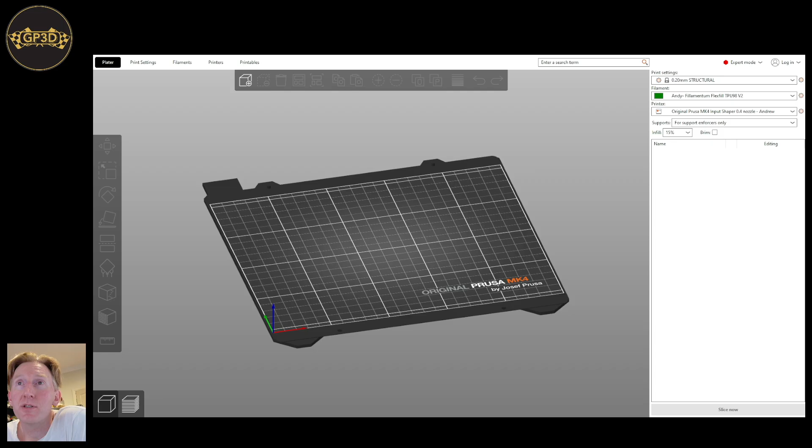Yeah, so this is the Prusa Slicer, and in the default view you get the 3D viewport, very similar to Blender in that way, that you can move around. And then you've got a whole bunch of settings. So you've got your plater here with all of its settings, print settings, filaments, printers as well. So the first step we want to do is add an object. So we click on the add here, and we go to,

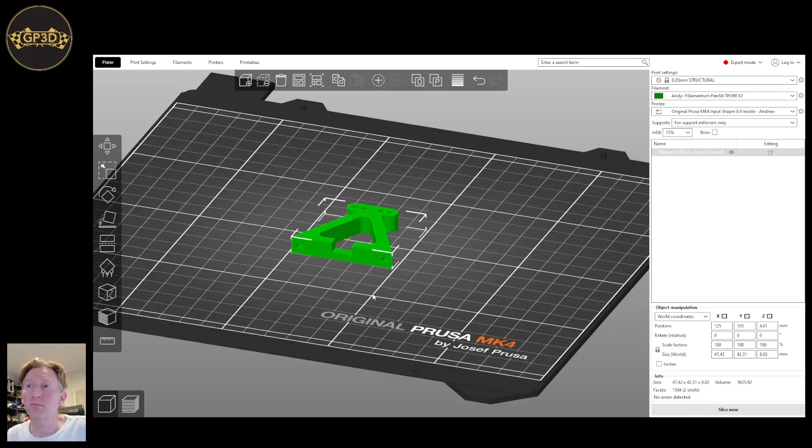just in the background, I will go and open the STL file that we just exported from CAD. There we go. So there it is. Magic. It'll come in here orientated the same as the way I designed it, which doesn't mean it's the way it should be printed or the way I want to print it, but it'll literally import in the same orientation as the way that it was exported from the CAD model.

So we can see here, it looks pretty good. If it was a bit of a broken mesh, like non-manifold, there's a really cool feature which fixes 99% of the cases. Well, let's go 95% of the cases. Fixes the vast majority of cases automatically. So you can right-click on the object and go fix by Windows repair algorithm. I think pretty much all slicers would have the equivalent of this. And it goes through a repair.

So when you bring it in, if you've got a little icon next to the name here, I can't remember the icon, I think it's like a warning triangle exclamation, something like that. If you just click on it or right-click fix, it'll do this little fixing process and fix up your mesh, which is really cool. If that doesn't fix it, then you've got to go back to CAD and work out the problem, like what we saw with the cylinders before. If it's too far broken, it might not be able to fix it properly. Or it might fix it, but not actually structurally correct for what you're trying to design. So keep that in mind.

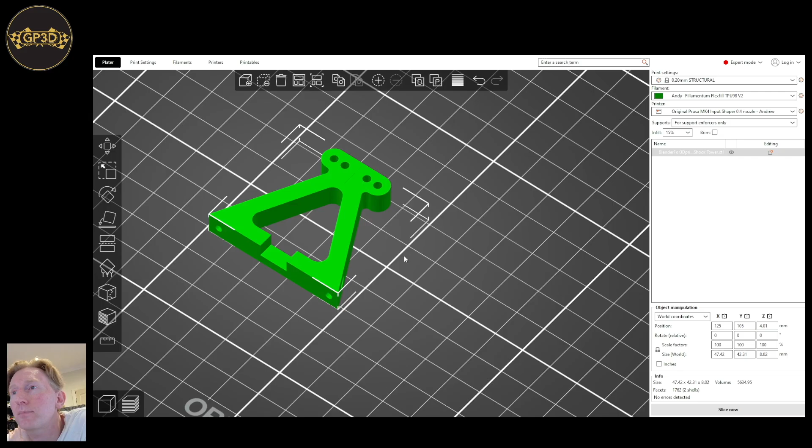With PrusaSlicer, like most slicers, but with this one, there's all of the pre-loaded configuration profiles. So depending on what layer height you want to print at, like 0.1, 0.15, 0.2, there's a whole bunch of preset profiles.

Filaments: you can install or activate any number of different presets for all of the different companies' filaments. So Prusa has all of their own products, of course, plus it has a whole bunch of other brands. Not everything in existence, but a lot. A lot of what I print is Prusament PC Blend, so I would select that.

And then the printer is whatever your actual printer is. So when you install the slicer, you would activate the printers that you have as printer profiles that you want to have available. So you can see here I've got the older ones: when I first started I had the Mark III and then the Mark III S upgrade, and since then the Mark IV came out and the Mark IV S. I've only got the Mark IV. I didn't do the S upgrade. It didn't really have a benefit for this type of purpose.

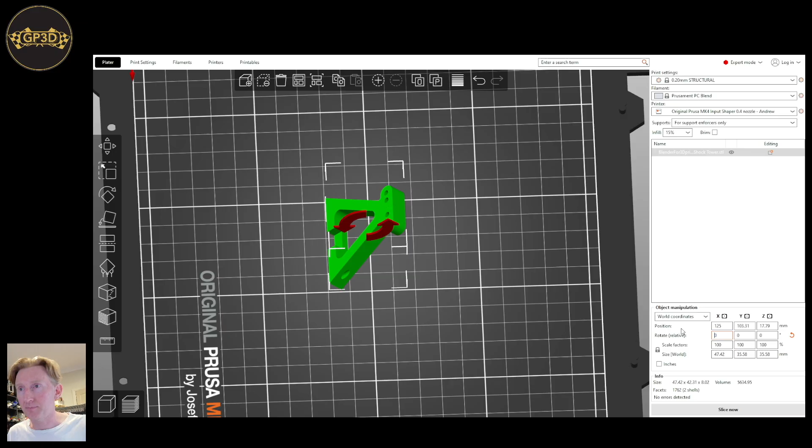So, for example, I might print it this way. So for this component, now we've got to decide how to print it. So it's a good segue. Every component would be kind of different in terms of how you decide to print it, like the angle you print it at and the settings that you need to print it with. So you've got stuff like this orientation. You can see there I've just tilted it up at 45 degrees. So I'll undo that. You could print it like this, and I'll click on slice.

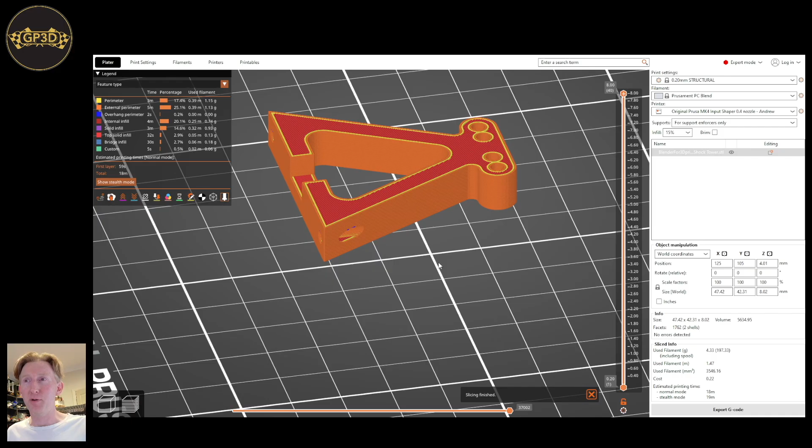Slicing is pretty much the whole purpose of this software, the slicer. What this does is it slices it horizontally into many layers. So we've set our 0.2 millimeter layer height, which is a pretty standard default. A smaller resolution, like a 0.15 or a 0.1, usually gives a nicer finish. The layer lines are less conspicuous. It's probably debatable, but I've found that a 0.2 gives slightly better adhesion, so each layer adheres to the previous layer better, which results in a stronger component.

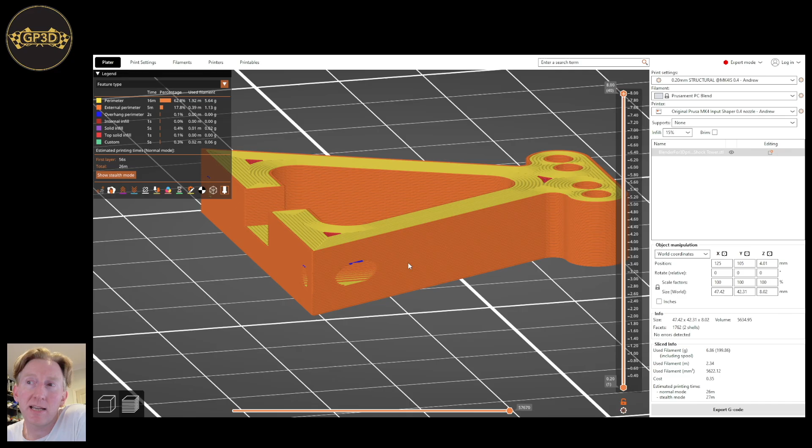So for most components, it's either 0.15 or 0.2 I print at. I think they're pretty similar. 0.2, I would say, is the ideal, as an arbitrary, non-scientific evaluation. The 0.15 gives you maybe a slightly nicer finish, where you don't see the layer lines as easily. And the 0.1 is the same thing again, maybe not quite as good adhesion, so it might compromise the strength of the component, but it'll look nicer on the surfaces.

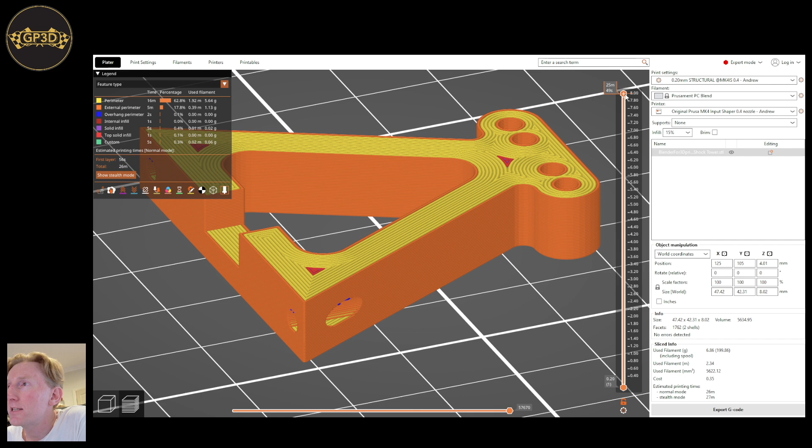So what you can see here is a few cool things. I've done the slicing, and we've got this slider here on the right. So if I slide this down, you'll actually see it at all these different layers of the object, which is pretty awesome. I'll change the number of perimeters here to 3.

And go back, because this will sort of demonstrate the layers a lot better. So right down the bottom, that's your first layer. And then this slider across the bottom here will actually show you the nozzle as it goes through that layer. So you can see the sequence that it's actually going to build the part, which is mega cool.

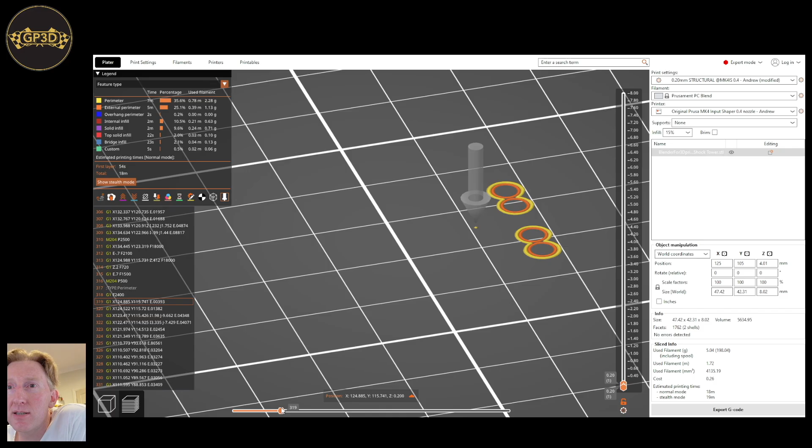How awesome is that? And then you can see here on the left, it's giving you like a preview of the G code. So the output of this slicer is going to be a file called .gcode, or in this case, it's binary G code, so BG code now. And that is the output that the printer understands.

So that sort of continues our process. The output of this slicing operation is BG code. I'll call it G code. And then that G code file is what gets transferred to the printer, and all these sequential instructions of coordinates and temperatures and movements is what the printer is going to execute for us, which is kind of very simple when you break it down into its granular pieces, but very complex at the same time, with all of these millions of little pieces working together.

So it's pretty incredible. Yeah, so this slicer is very cool software, and it shows you how everything's going to be printed effectively, step by step. So each one of these lines on the left here, like you can see they're numbered, is basically one step for the printer. So it'll be maybe one movement of the print nozzle, like an X coordinate, a Y coordinate. It'll be a temperature setting or some other retraction type setting, a whole bunch of different operations that the printer can do, and it's just telling it to do those things one set of operations at a time.

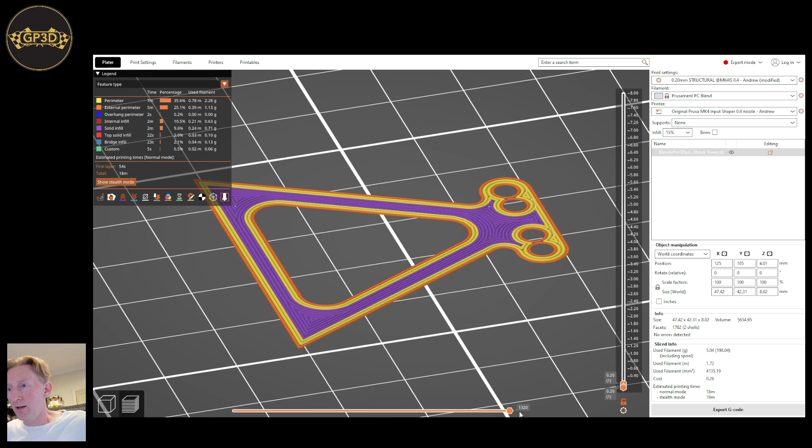You can see, even if you look at it, a code like G1, and then an X coordinate and a Y coordinate, and an E coordinate, which is the print head extruding, so E for extruding the filament down. So it's saying how much filament needs to be pushed out. So it's just a whole massive sequence of all these different instruction types. Cool. So we can see how this thing's going to be built.

And then we've got a whole bunch of settings. So print settings, layers and perimeters. So you've got your layer heights, number of perimeters, which is something I'll definitely like. If you're just printing a basic static model for the shelf, two perimeters is usually enough, and you'd probably be using a material that's not designed for high impacts. PLA, PETG is a nice material for static models.

Some of them, like the tough versions or some PETGs, could be used for RC racing cars or other similar models, but they definitely will break easier, and they tend to not hold threads very well. So if you're screwing a bolt into them, it'll cut the thread the first time and hold pretty well. But if you're taking it out, screwing it back in, it wears out the thread very quickly.

PETG and PLA are also quite stiff, so that makes them a bit brittle. PETG is a little bit better, has a little bit more give than PLA, for example, but is still not that flexible in terms of material properties compared to the PC blend. So that PC blend material has pretty much made everything I've done possible.

Like all of the suspension components, everything that's going to take force, take impacts, needs to be assembled and disassembled many times, like all the threads, to maintain their integrity. That material has just worked amazing for me. So pretty much all my kits, all my cars have been done with that, especially the off-road buggies, for example. So it's pretty awesome.

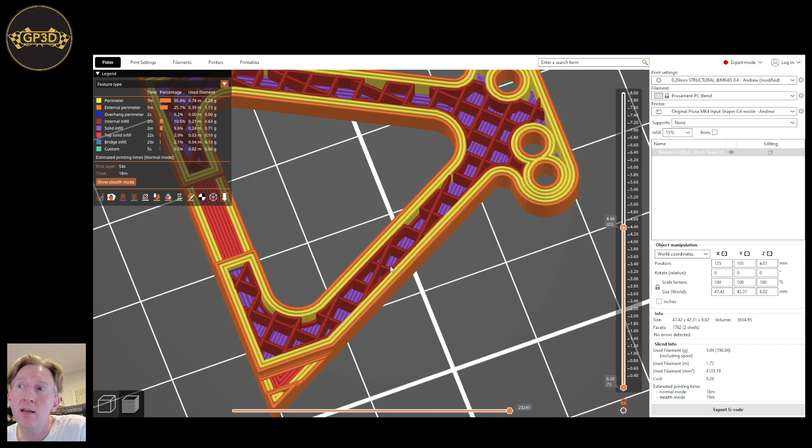And once you change all of these settings, you can instantly see the result. So you can see here we've got 3 perimeters, like 1, 2, 3. And if I slice it again and scroll down our layers a bit, you can see the infill now. Because I've only got three walls, you've got 3 walls there, 3 walls there, and then you've got the middle bit, which is the infill. And this is the rectilinear pattern, so basically a square rectangle type pattern in a sort of box structure, I guess, which I find adds good strength and minimizes the weight gain of the part.

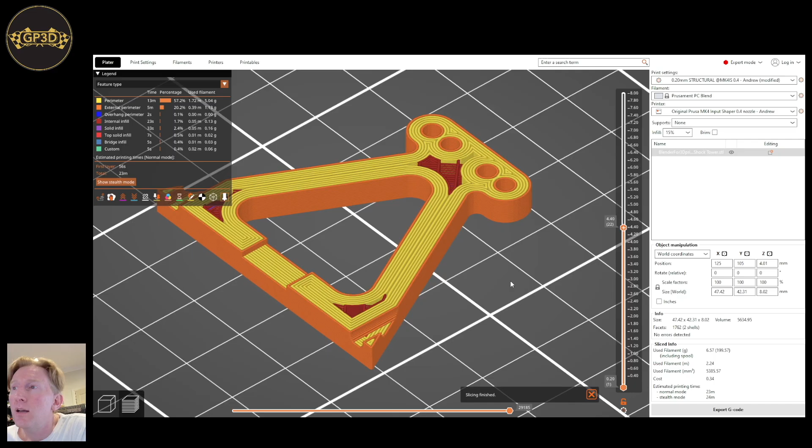So if I want to make this part stronger, I'd probably ignore the infill, and I would go and increase the perimeters. So let's see the effect of increasing it. So from 3, I'll bump it up to say 6. So if I go back to the plater, see it's gone away from the sliced view because I've changed the setting, so it has to reslice. So we just click the slice button again. Yeah, so now you can see we're halfway through the object here. Now you can see that we've got 6 perimeters.

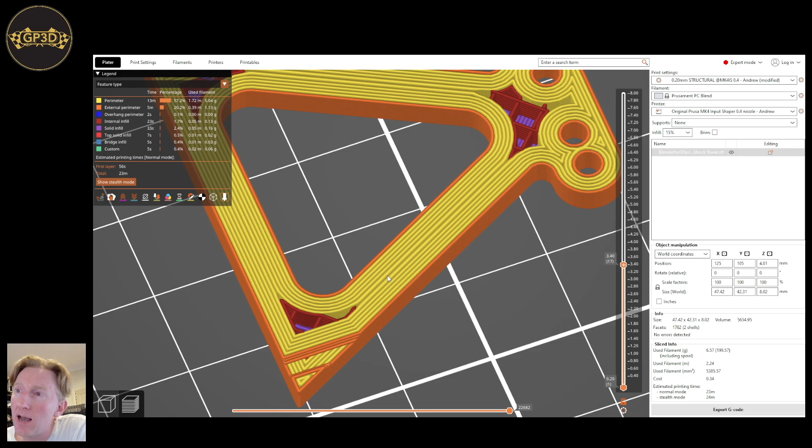So the orange is the outside perimeter, and then we've got 5 more inner perimeters, or inner walls, I guess. You've got 1 perimeter and then 5 internal walls. And in some areas of this part, that's enough walls to actually touch. It meets up with the other side, so you get effectively a solid component. But you can see in some areas where it's a bit thicker, the 6 perimeters don't fill the entire space, and then your infill takes effect. So you can see it up here a bit better.

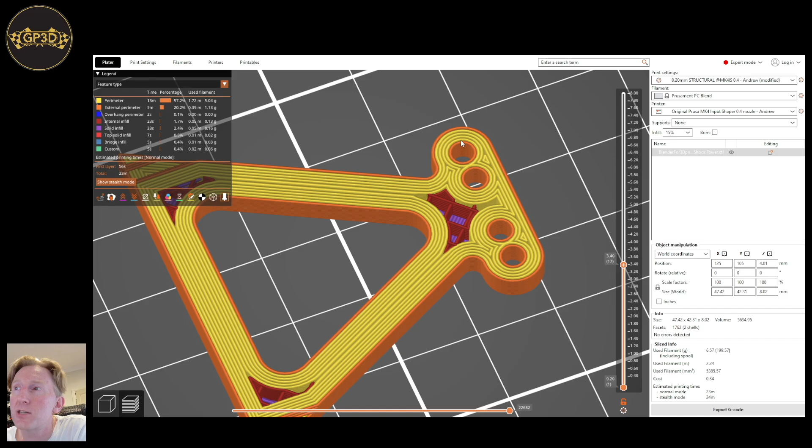So there's still a bit of infill here, but you might go, oh, that looks pretty nice. I'll leave it like that. It's got quite a lot of perimeters around the holes, so I'm going to get good support there, because that's where you need a bit of strength as well. So you could go, yeah, that looks nice. Or for such a small component and for such a minimal difference in weight, I might go, stuff it. I'll just increase the perimeters heaps so that effectively it just fills up the whole lot. So slice it again, and you can see here there's no infill now. It's just got perimeters all the way in until they meet in every part of the component.

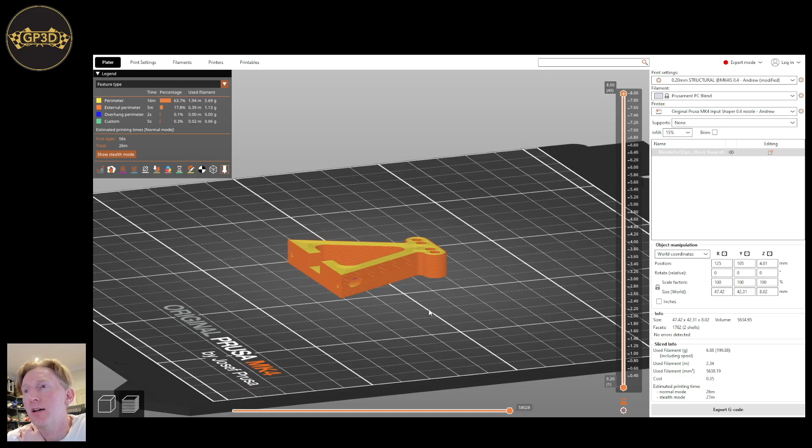And that gives you basically a solid plastic object. For this object, it probably needs it. With this PC blend material, the material shrinks slightly as it cools. So it prints super hot, like 275 degrees, and as it cools, it'll shrink a fraction.

And that shrinkage is an issue with 3D printing, because as each layer prints on top and starts shrinking, it's like 0.0 something of a millimeter, but you get that tiny amount of shrinking at each layer, and because the layers are stuck to each other, they can't pull inwards. The forces tend to pull upwards on the edges, so the edges of the component try to pull themselves off the print bed, which is the key issue printing materials that have that shrinking characteristic.

So what you can do, there's a whole bunch of things, but like a chamber, you print inside the chamber. So you can maybe see here behind me, in the other view. I've got, where is it? This one, little box. Yeah, so a chamber around the printer keeps the temperature higher and lets it shrink at a slower rate.

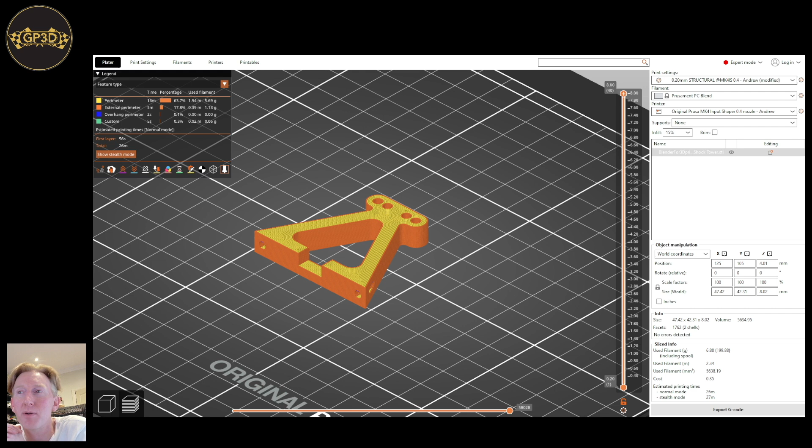So it helps reduce or minimize the tendency for it to lift off the print bed, because once the print detaches itself from the print bed, it's pretty much ruined. You might get away with it sometimes if it's only a tiny bit and it's later in the print, but you'll find the corner will lift up, and the printing above it will get a little bit squashed and messy, not the proper shape that you want the component to be. So if you're wanting accurate engineering components, it's critical to keep it down.

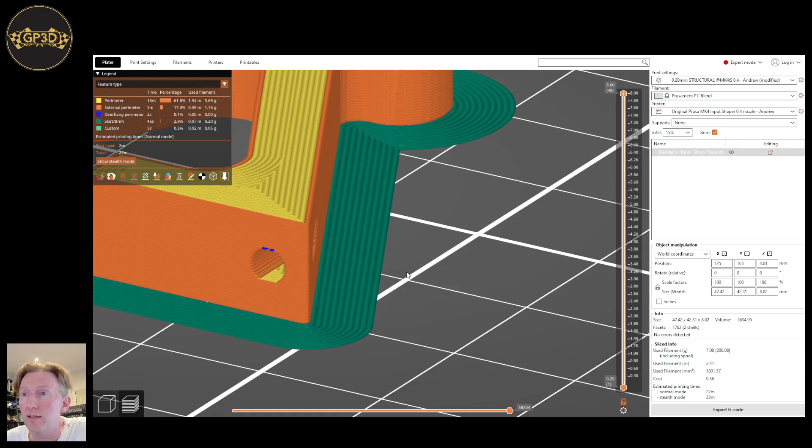So one of the methods of doing that is adding a brim. So you check the brim box and reslice, and now you can see the green is the brim. So it'll print this brim as extra material to give it adhesion. And because the brim is only one layer, you can see here, you just get one layer. There aren't layers on top of it to then try and pull it up or lift it up as it shrinks. So that stays nicely stuck to the bed.

And you get the interface between that inner line of the brim and that edge of the component, so that sticks together. So then it's basically stuck to your component. It's part of it initially, and that helps keep the whole thing flat and structurally accurate as you desire it.

And then after it's printed and it cools down, you break it off the print bed, and this is very thin, it's only 0.2 millimeters because that's our first layer, or all of our layers in this case, but first layer is 0.2. It's a very thin bit of plastic, and you can rip it off or you can slice it off, and then you just clean up the edges with the scalpel and sandpaper.

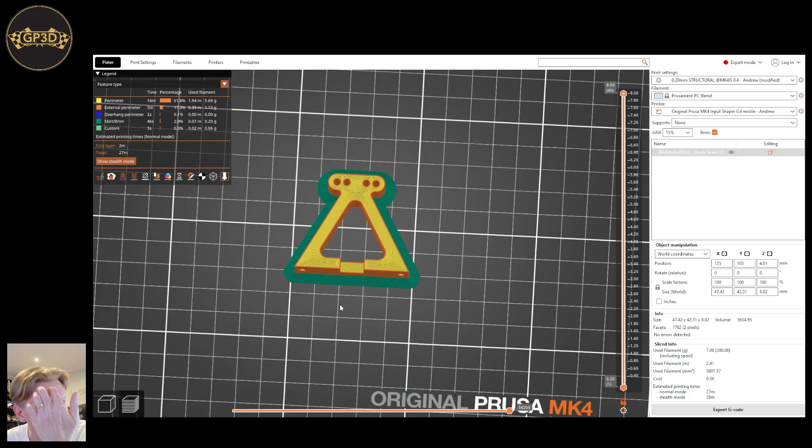So that's another good method that I often use, especially with a small component like this. You might get away with it or you might not. A smaller component you can get away with usually. It depends on your printer and your environment and the moisture and how clean your bed is, and what sort of preparation you do. So there's a myriad of items that I'm not going to go through in this video, for another day. And all those things affect whether it prints properly and stays stuck to the bed.

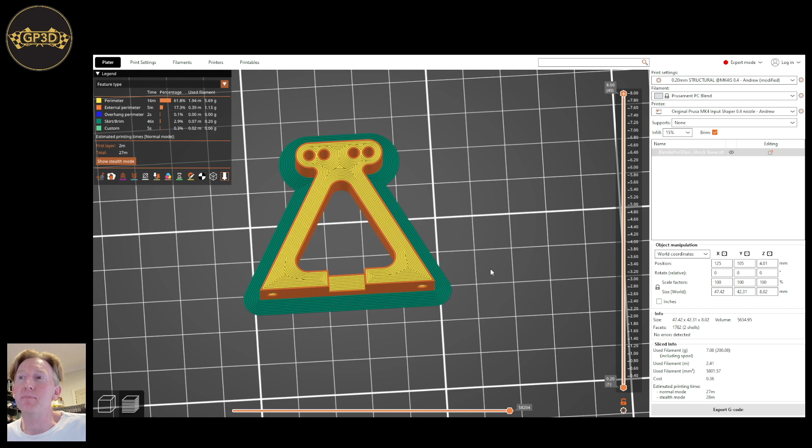Even the bed material, like the actual type of print plate that you use, steel and PEI and various other textured and non-textured materials. You can put glue on it, all sorts of stuff. But yeah, the idea is to keep it nicely stuck to the bed. So all of those aspects combine to keep it well stuck. Yeah, so I could print it like this.

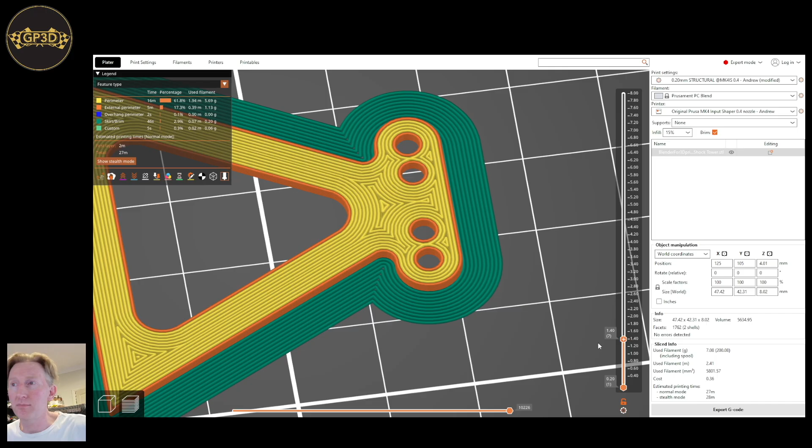It'll print nice and flat. You got a nice sort of shape of the thing. You get good flat surfaces. It'll be very strong around these holes because all the layers go up perfectly around the holes. It'll give you good strength for the threads to cut into and to support what it's supporting, the shocks in this case.

Oh, I noticed a hole missing. I'll get back to that. So those holes are good, but you come down here and you see this hole. So this one is actually a problem.

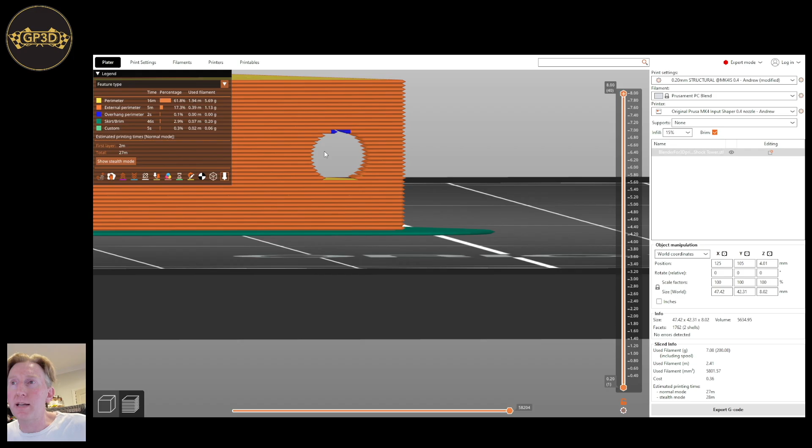So one aspect is, because you're not actually printing a sort of circle here, you're just printing flat layers, you tend to get an elongated hole. So this will end up a bit wider than it is tall, which usually isn't a major issue because you're just threading like a 4-40 or an M3 or whatever bolt into it, and it just cuts the thread and you're fine. So that's less of an issue.

But what you can see here is, I'll come down a bit more, we've got this very small layer area in all of these layers around the outside of the hole here. So this will basically be a weak point in the structure, and it's where it's going to break. So it doesn't matter how strong the rest of it is.

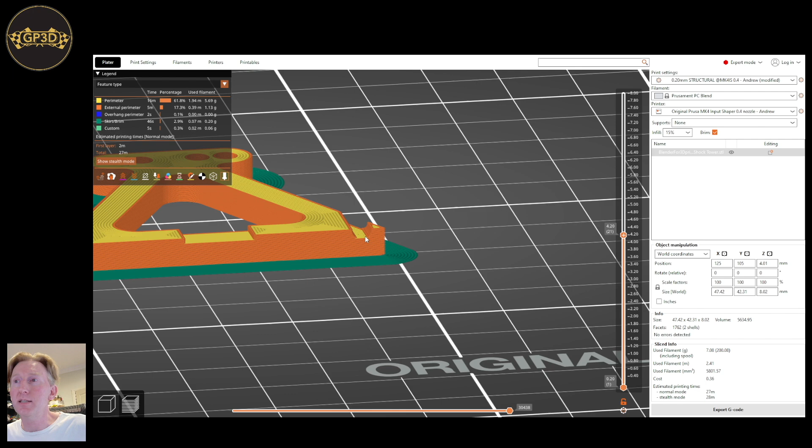Yeah, you've got really super strong points, but then you've got this super weak point, and nothing else is going to break, but this bit's going to break. So if you get an impact or a force, whatever, it's going to split here very easily on one of these points, and then you're stuffed.

So what we want to manufacture is to more evenly distribute the strength. So I might need to sacrifice some super strong parts or some cosmetically beautiful areas of the component, and I want to distribute the strength so it's more average, more even across the whole part. So we're basically lifting up the weak point.

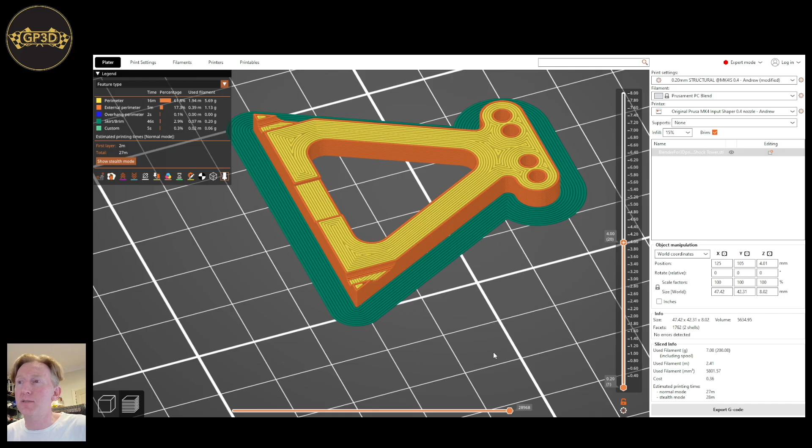We might need to lose a little bit of strength in the strongest point, but that's a balance that's going to be fine because if it breaks somewhere, it doesn't matter how strong the strong point is. And generally, if you can make your weakest point strong enough, anything stronger than that's going to be better again. So it doesn't matter that it's 90%, not 100% strong.

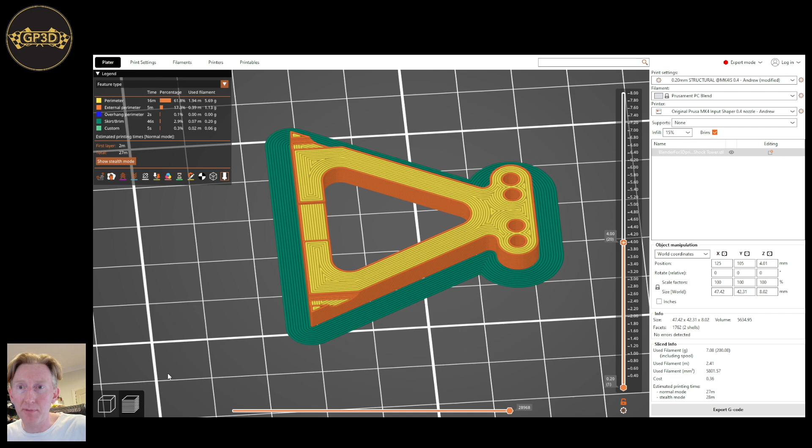Yeah, so for this component, what I will do is go back to, so this is the slicer view, which is this icon, and then the one to the left is the editor view. So I think tab will toggle between them, so pressing the tab key, or you can just click on these icons. So yeah, we'll go back to the editor view, and I'll do two things. First is, I noticed I've missed a hole.

So my component has a hole in the top, oh yeah, you can see, there you go. Little tiny hole in the top, which is actually, I think, where the top shock mounts for the pod. And I have probably forgotten it. So this is a good demonstration of the iterative process. I will toggle back to Blender and go, yep, I have missed it.

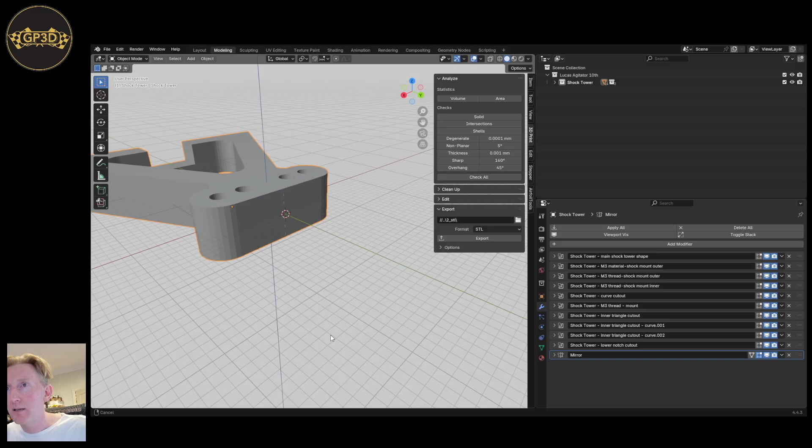So very easy. It was hiding around the side there. So I've got the cut out here and give the same treatment to it, change that to wire. And then, shock mount, yep, I've missed it here. So now I want to go Q and B. I'm going to add another boolean, and I'm going to make it that one, center top, fast, copy, very good.

And I'm going to demonstrate something here as well. So see how this is now sequentially after the mirror. And in this position, in this object, it would actually work either way. So I could drag this above the mirror, and you can see that it's pretty much doing the same job, making a hole.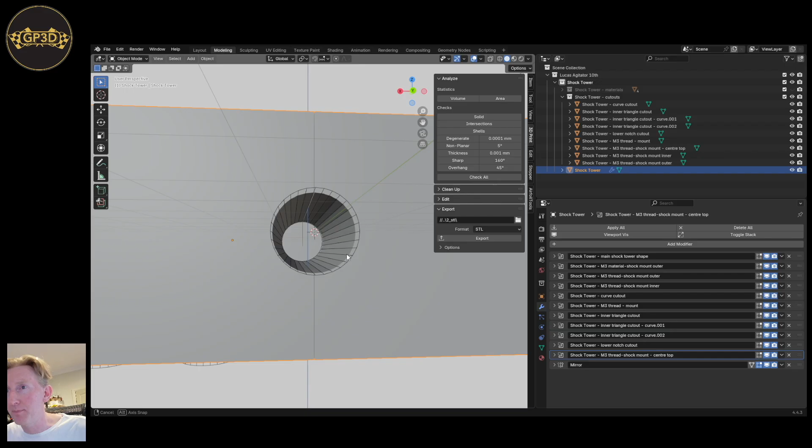But I'll grab this and move it 5 millimeters. So we'll put this back, but just say that was the design. And I go back to here and add my boolean below the mirror. See how, because effectively the mirror has happened first.

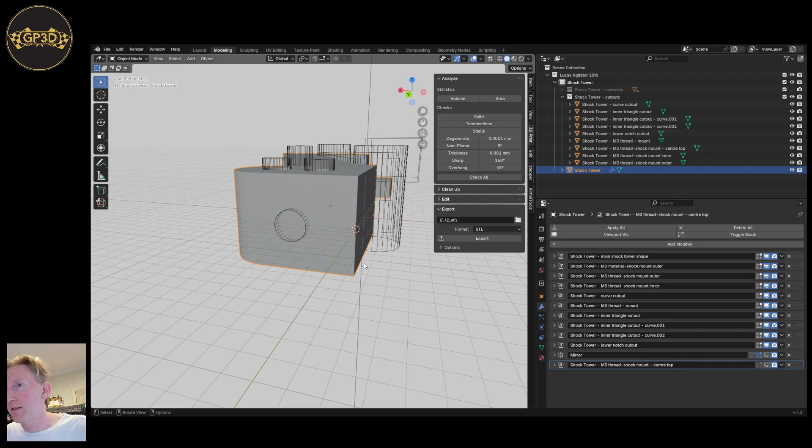So if my mirror is about to happen, yep, there we go. So if my mirror is about to happen, my object looks like this, my hole doesn't exist yet because I haven't executed it. So remember, this executes in sequence, top to bottom. So if I then execute the mirror, I get my object here, and then I execute my boolean, which happens afterwards.

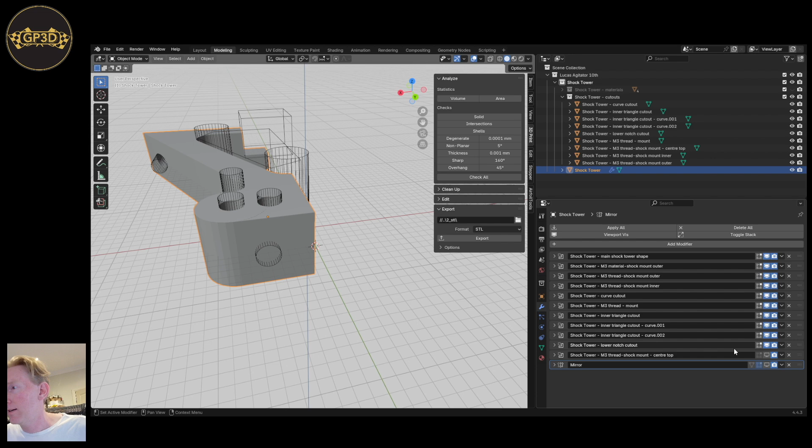This is my boolean operator object, and it chops out a hole here, and that's it. But just say I want there to be a hole in both sides, if that was the design. I want to move that to above the mirror. So basically I come down here, I execute that hole, and then I execute the mirror. So that's what Blender's doing in terms of processing sequence. So then I would have my hole on both sides.

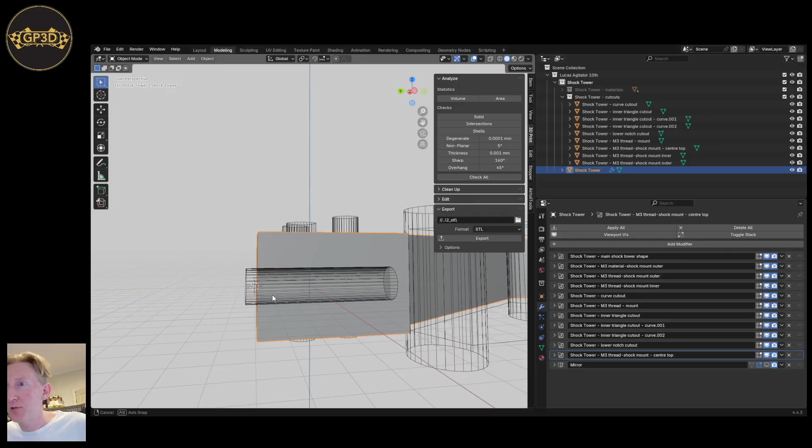Because this is in the middle, it kind of doesn't matter, but I found best practice is just to do it the same way. So you'd put this before the mirror. So effectively, it's just chopping out that hole there in our object as it currently stands, which is half the final result, which is what we want. And then we just mirror it. So execute the mirror, and our final result is a hole in the middle.

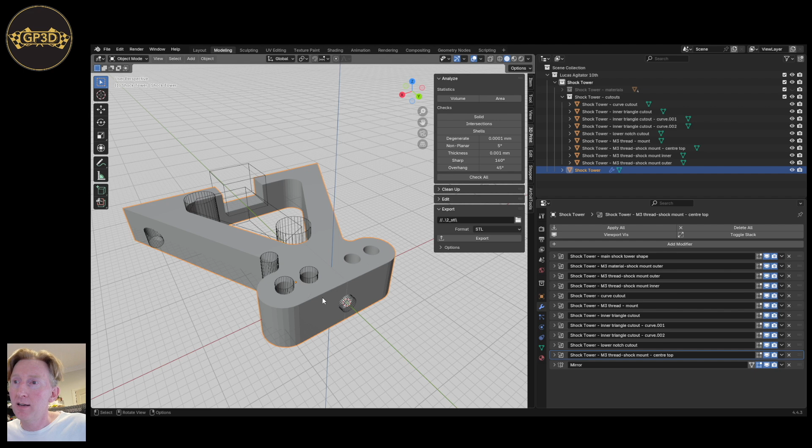So it's really super easy doing this non-destructive type Boolean modeling. Super easy to make those sort of changes, fixes, evolution of your component. So now I've done that, I just go and export it again. And if I flip over to the slicer view, because I've already imported this object, it's basically pointing to that same file. So all I need to do is refresh.

So I can hit F5. F5 will refresh all the objects in the slicer. I've only got one imported now, but F5 does that. I can also right click on a specific object and go reload from disk. And you'll see now I've reloaded my model and it reflects the fix I did, which was to add the hole in there. And that's that process. Awesome. Cool. So that was the first thing.

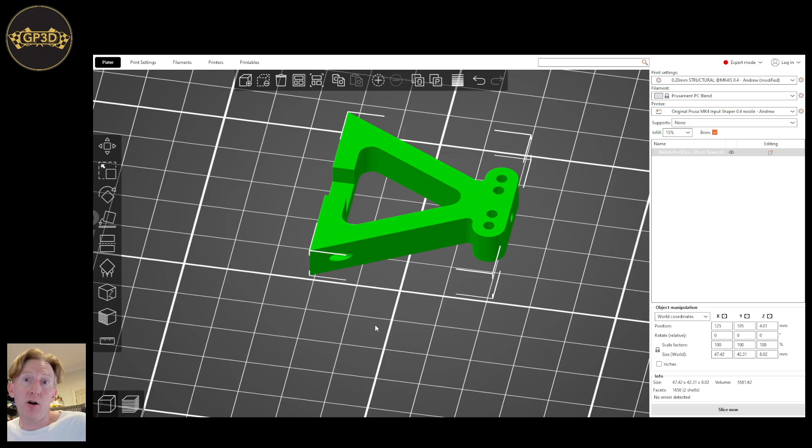So second thing now is I want to try and improve my strength here. As I mentioned way back at the start of the videos, I will probably change the design of this area a bit, like add a bit more material. I might put a step sticking out with a nut on top, so you could secure it with a nut as well, potentially. I'd look at the car, it might be able to extend out a bit further if it doesn't hit anything. Just increase the shape of the component to add more material, which will make it stronger. It might be strong enough as it is, might not be.

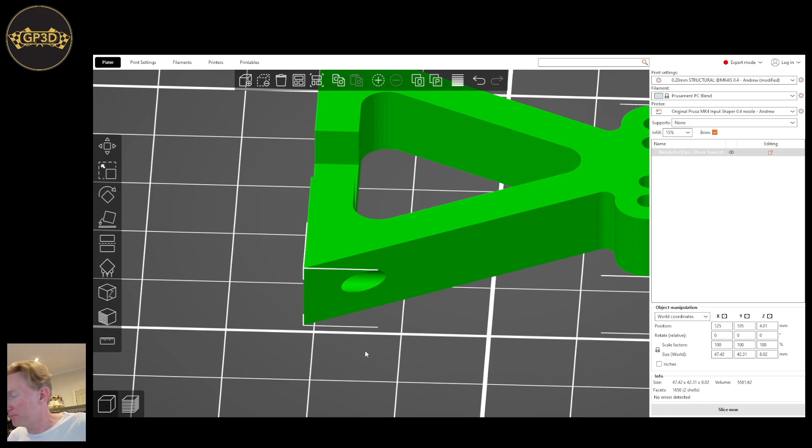That's the evolution process of designing, estimating how strong parts need to be, but then you ultimately have to go test them and see if they break or not. Not scientific, but that's the way I do it. And after a while, you obviously get a pretty good feel of what works, what doesn't, how much material you need in certain circumstances to make a component fit for purpose and strong enough. But initially, it's just gut feel and trial and error and physical testing.

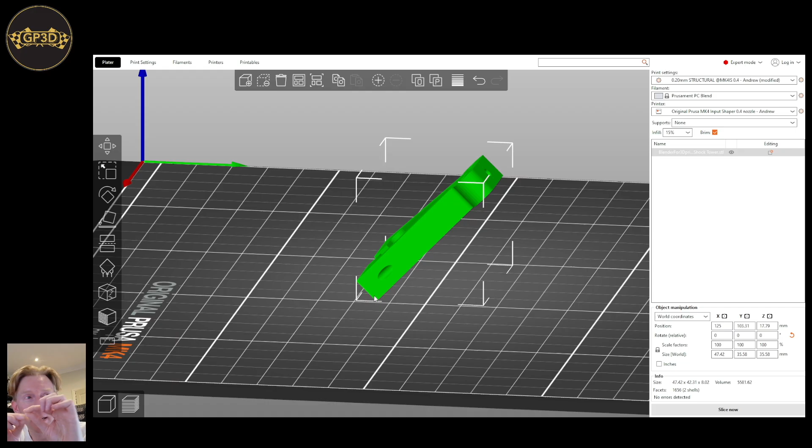So I'll just say this object as it is. What I would do is probably rotate it. So I'll tip it up at 45 degrees. 45 degrees is a super cool number in printing, because it means that you don't really need much support, or maybe no support in a lot of cases, because printing layers upon layers at a 45 degree overhang will effectively work. You can't print in midair because of gravity; the molten plastic will just fall, so you can't print onto nothing.

But what you're printing onto is the previous layer, and a 45 degree angle gives you enough non-overlap, I guess. Some of the next layer of print will be off the edge and some of it will be on the previous layer, so you've got enough on the previous layer that it sits properly, prints nicely, and you get the perfect result. So 45 degrees is a very important angle. Cool. So now this has done a number of things.

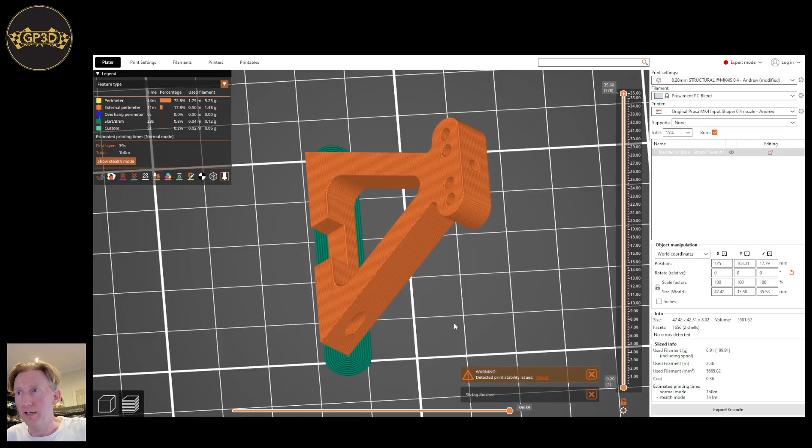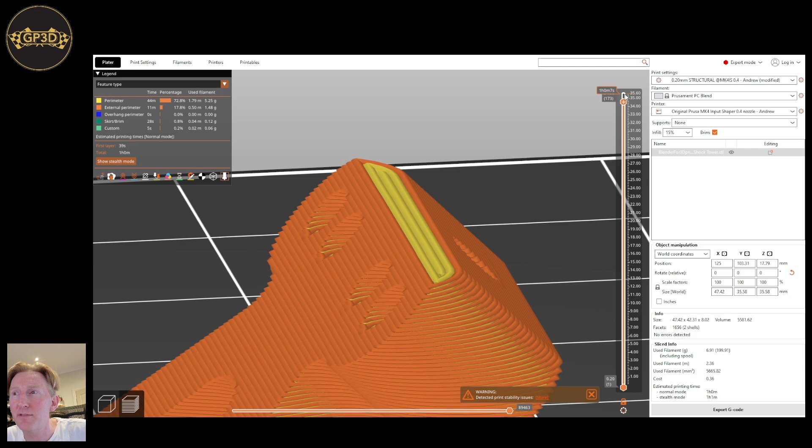One is I'll do a quick slice. So we can see there's actually no top and bottom surface now. This one line is our bottom surface effectively, which is negligible. And there is no top surface, but the very top of the print is this one line here. So the top layer, if we go down one layer, you can see that it's like one little layer. Go down a few more. So effectively we've removed the top and bottom layers. Everything is pretty much a sidewall, which also gives you a nice consistent texture.

So 3D printing, you obviously have all of the layer lines, but you get that evenly across the whole object rather than layers on the side. The print bed, the smooth print bed or the textured print bed surface at the bottom, and a top layer which looks, you can see all the lines where it fills in the top layer, and generally it's not consistent texture. It never looks fantastic. Looks is a secondary purpose here, but it is quite important. I like to try and make it look as nice as I can as well. So yes, that's one thing it's done.

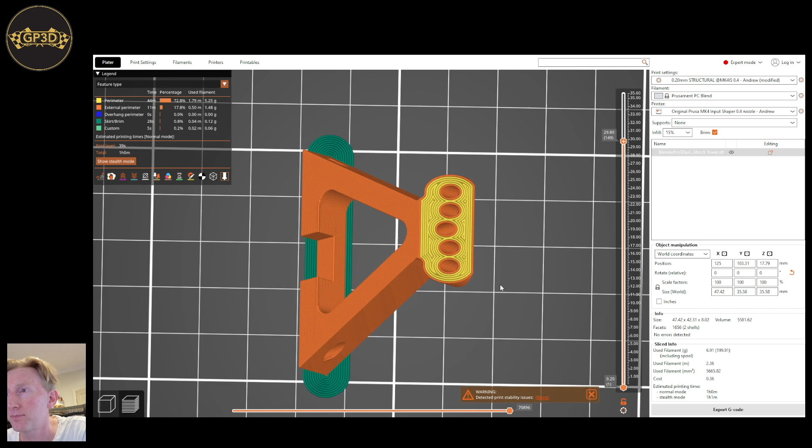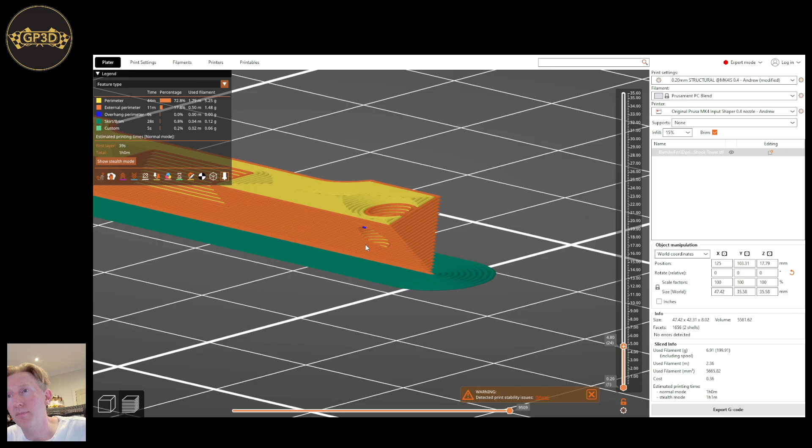The second thing it's done is the cross section around the holes will be bigger. So up here it's all good. It will be probably even better than it was before, because you've got a lot more surface area. But effectively, it'll be good both ways there. But if we go down to this problem area, so this is the sort of bottom of the actual component where it goes in the car, and the bolt will go up through the carbon plate and try and thread into here.

So what we've done here, it's the best way to show this. Yeah, so at any point around the hole, like sort of here, or even further down, we've got a lot of surface area, like big massive surface area. And then as it goes up and it encapsulates the full perimeter of the hole, we've still got a lot of surface area around. We've still got narrow edges, of course, because that's where the hole is, and that's where you'd redesign the actual shape of the component if that was not sufficient.

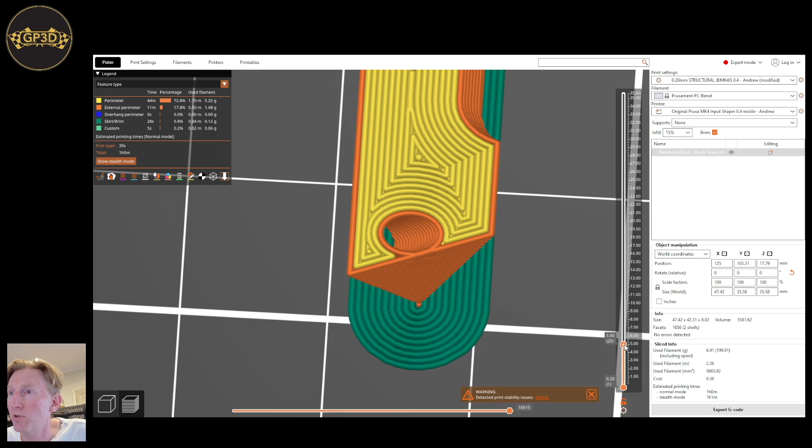But what we have done just by orientating it as it is, we've increased a lot of the surface area here. So it's not as small as the previous version would give us in terms of the weakest point. So we've basically bumped up the weakest point massively, and that could well be strong enough. Might not be, but that's the testing step after that, or decision to add a bit more material, because it slants in. I could easily make this more of a square shape, of course, and go up a certain amount and then come in. So that's the design revision process. Yeah, so as it is, that's pretty good. It might be sufficient.

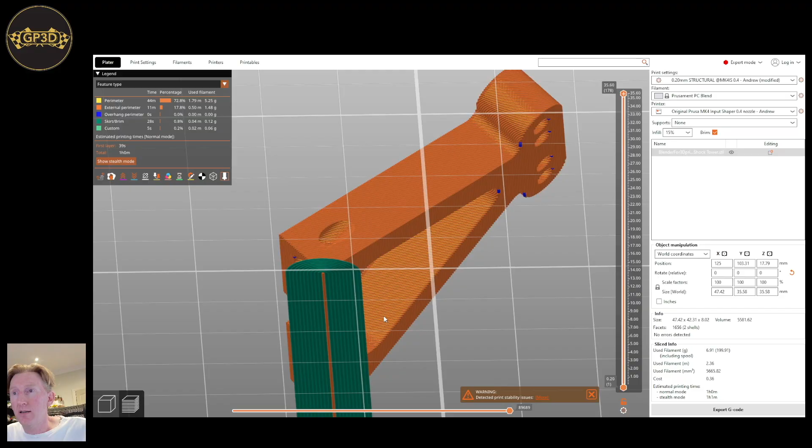And then the third thing it's done is made this print very unstable. So now we've only got this one skinny line, which is the first layer. So if I go right down to the first layer, we're anchoring this whole print on just this one thin line, which might come detached, like it might warp, it might not be strong enough, the whole part might wobble as it prints, a little bit of vibration, so you might get very bad print quality, and all the sides will be terrible if it vibrates too much.

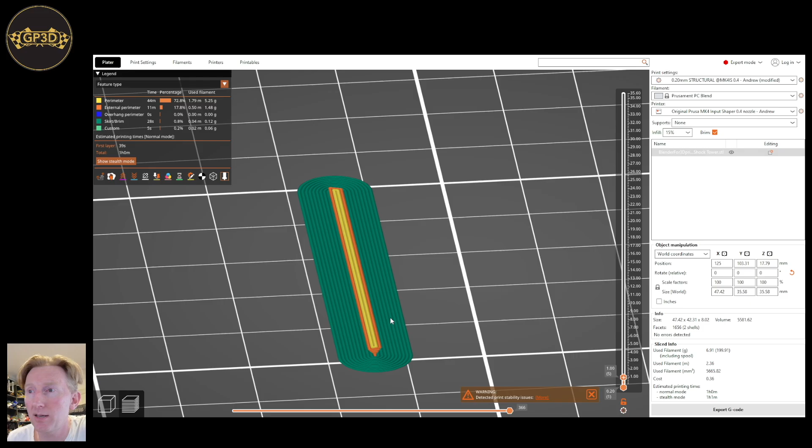It might simply just break off if it gets slightly knocked by a bit of extra material as it prints, if there's an over extrusion or a bit of debris. If the print head just puts a bit more force into the object as it prints, it can just literally break it off the bed and your print's dead. You have to start again. So there's a couple of ways we can address this.

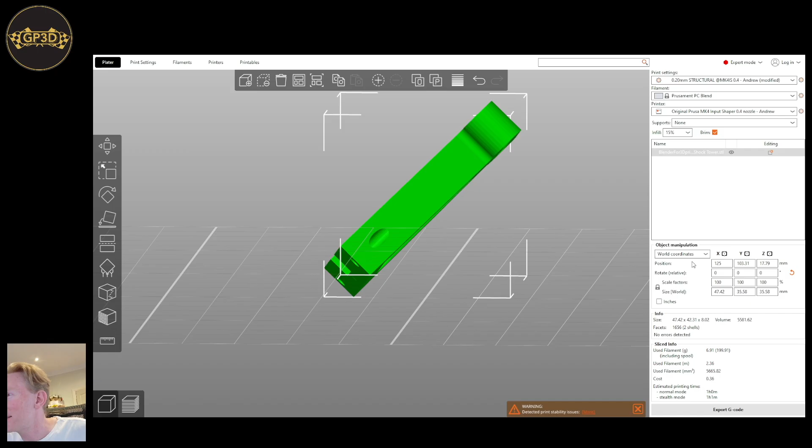For this one, the main and maybe the only thing we need to do is, I'll just toggle back to edit view, I can actually sink this component into the bed. And obviously it won't print anything below the bed because it's a physical thing, but we can see here the Z height of where this object's sitting, so its center is probably up here somewhere, wherever we designed it. But if I drop this down, I can drop it down numerically or using the interface, we go from 17.8 to about 17.

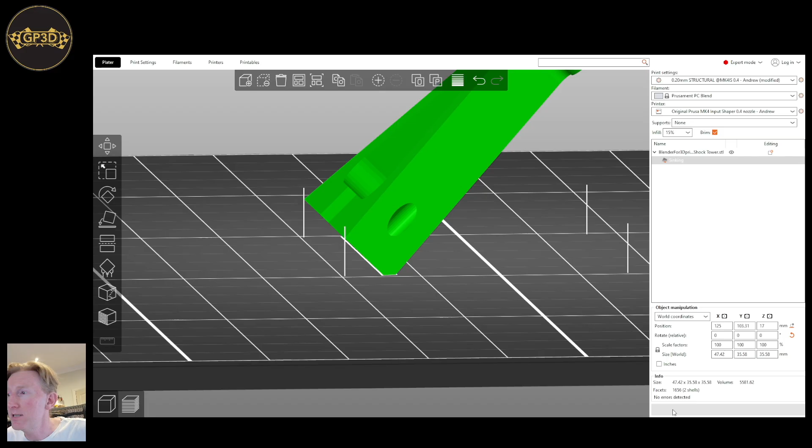So now you can see this has actually dropped, it's called sinking. So I've actually sunk the object into the bed, which effectively chops off that piece of the object, so it never gets printed. It will only get printed from the bed upwards. So now if we slice, you can see here, instead of just one line, we've got 3 lines. So I've got a bigger surface area for it to contact.

And that may or may not be enough without support, or we can add support as well. So we could keep going. Another way to do this is to select the object, click the move icon and grab its handle. So see here, I can move it up and down, sort of freeform.

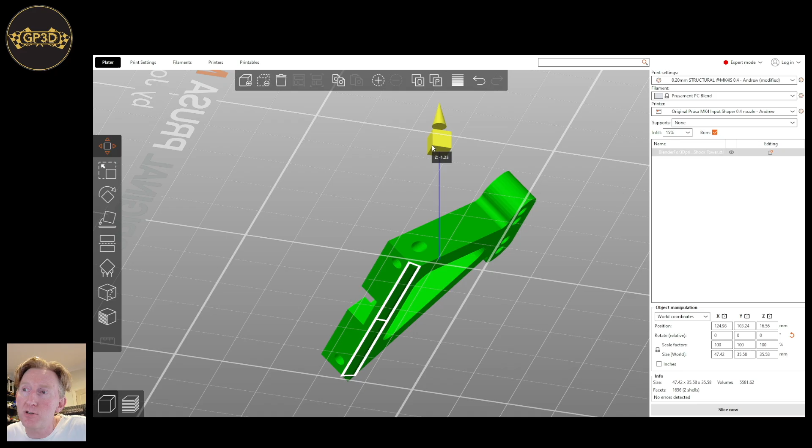I'm sacrificing a portion of the object, which may or may not matter. In this case, it probably won't matter too much because it mounts by these 2 bolts. I've still got quite a bit of surface area for it to sit flat onto the carbon plate it attaches to. So basically just trying to find a good compromise of increasing that surface area as much as possible without cutting off too much of the component.

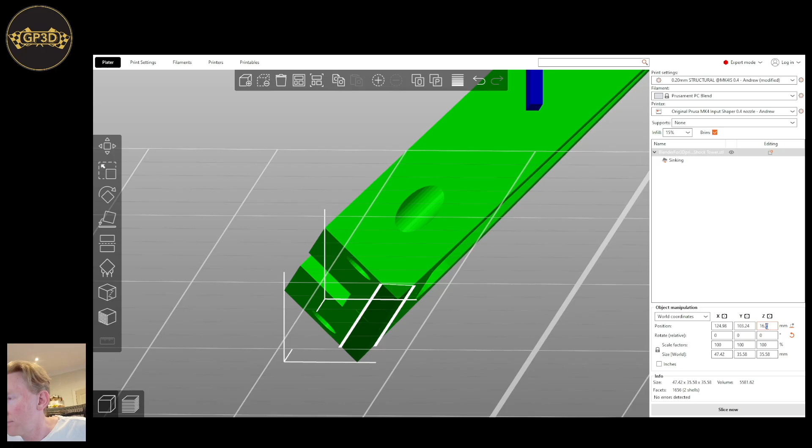So I could change that to say 17, 16, yeah. So that's probably pretty good. So it chops off the corner a bit. 16.8 still leaves enough surface, so when you bolt it down, it sits flat and it won't wobble or break because of that. So that gives us a better adhesion to the bed.

And then the next thing to look at is supports. So at the moment I've got supports set to none, which is set here. And I can also look up here, see these blue parts, that indicates an overhang. So that's where it's actually going to print, in this case, a very small amount of material over thin air. There's no plastic below that when it prints it, which means for that little bit, it's going to sag a bit away from where it ideally should be.

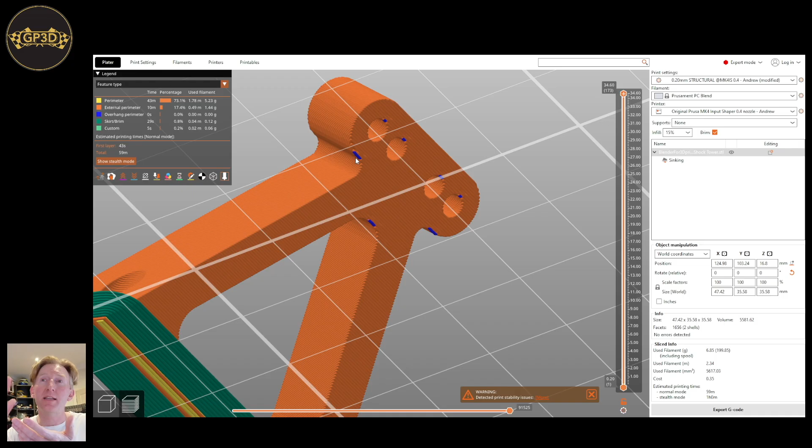And that'll give you just a rough spot on the print. You lose a bit of material. It's ugly. If it was really bad, you would compromise its shape and strength. Tiny bits like this probably won't matter too much. You'd just trim it, sand it with a bit of sandpaper. It's so minor it probably wouldn't matter. And these ones at the top of the holes definitely won't matter.

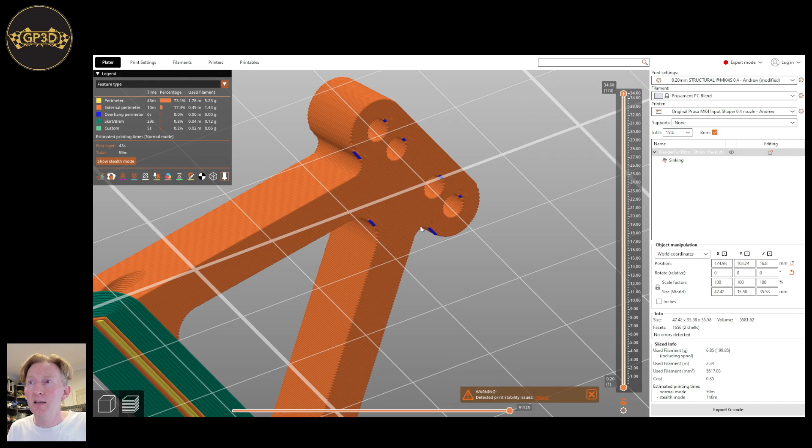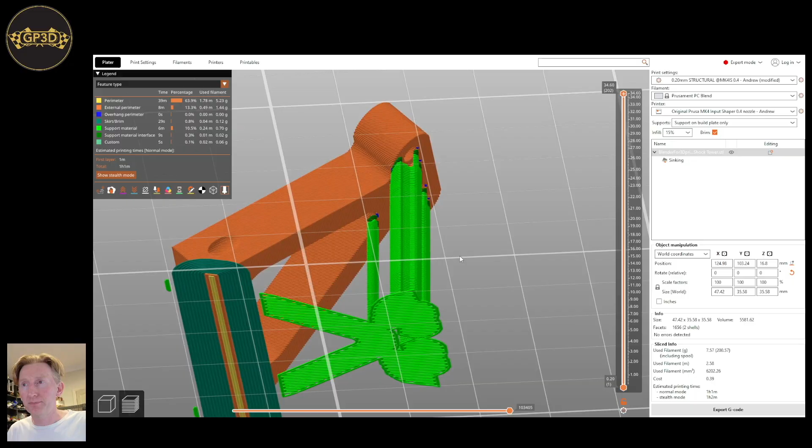But what you can do is enable supports. So firstly, I'll enable support on build plate only. So that's that setting there. And then reslice. So now you can see it's basically an automatic determination that's made based on all of its settings, which we can manipulate. And it's put up these bits of supports, which are probably not really going to help much, based on my experience and gut feel. So I would probably just print it like this.

The other option is paint on supports. So it's kind of like an override saying I want more supporting capability, or a more comprehensive support at certain areas. So I can go into this mode, which is the L key, and it gives me paint on supports. And I can say I want some more supports in these areas.

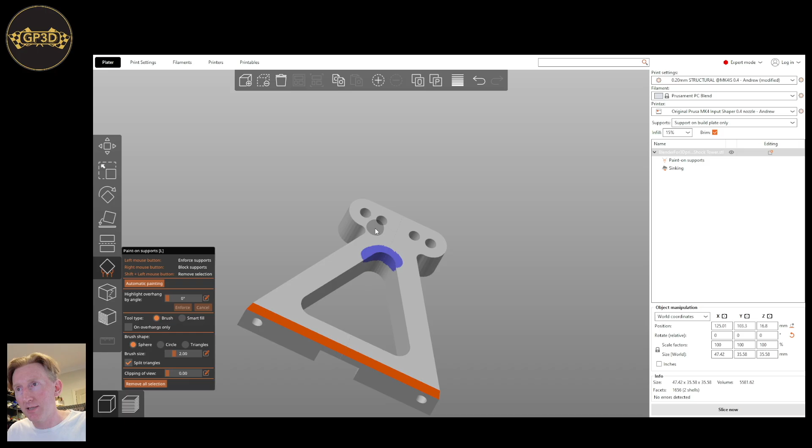And these holes, I probably would leave normally, but I can right click and actually put a red mark, which is a blocker. So that's going to block supports from the top of those little holes because it's so minor it's irrelevant. It just wastes a bit of time and material in the print. But the key area is there, which is an overhang.

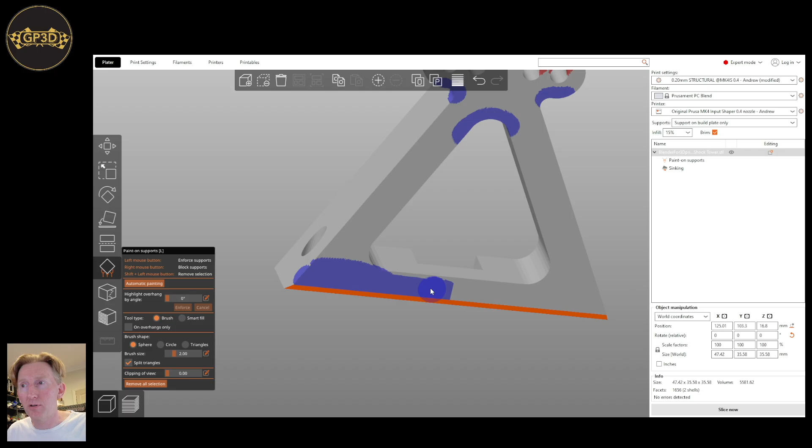I could add a bit more support down the bottom if I felt it was necessary, put it along all this area to just give it a bit of stability, but I don't think it really needs it. So yeah, let's see what that looks like though. So that's my paint on support. So I'll slice again. So now we should be able to see a few things. So see all this dark green interface.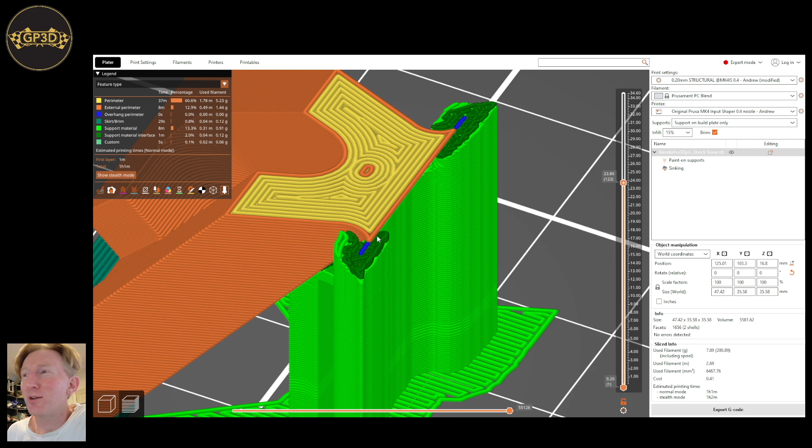So that has given me some extra interface material, in dark green, making sure it supports this bit of blue, which is the overhang, as best as possible. So it's only that tiny little bit. As I said, it probably would be sanded off, no problem, and it would save you all of the extra material and time for the print. But that's a decision of quality and necessity versus time and material.

It's probably only a few cents of material and 5 or 10 minutes of print time. On a small object like this, it's irrelevant. On a bigger object, it could make a big difference to your material usage, your cost, and your time cost. Yeah, you can see it also here along the bottom, because I painted that bit.

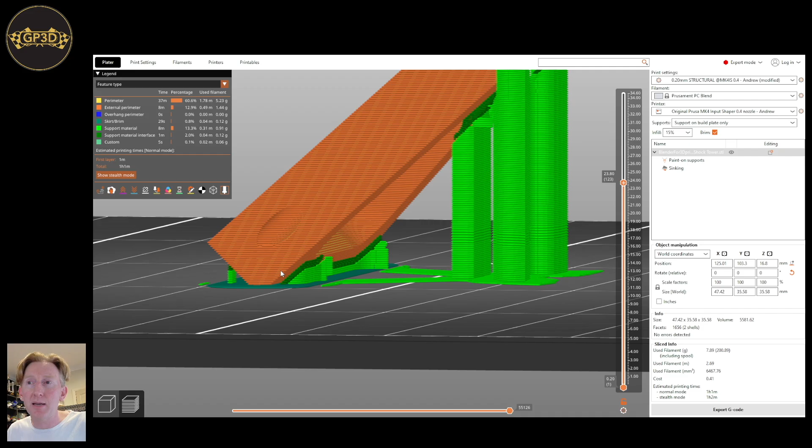It gives a bit of support at the bottom here, just to give it a bit of security, to keep it balanced, or keep it supported as it's building the foundation here, because then it's going to cantilever all of this extra print until it gets further up. So it helps support it, because you've got extra weight as it prints.

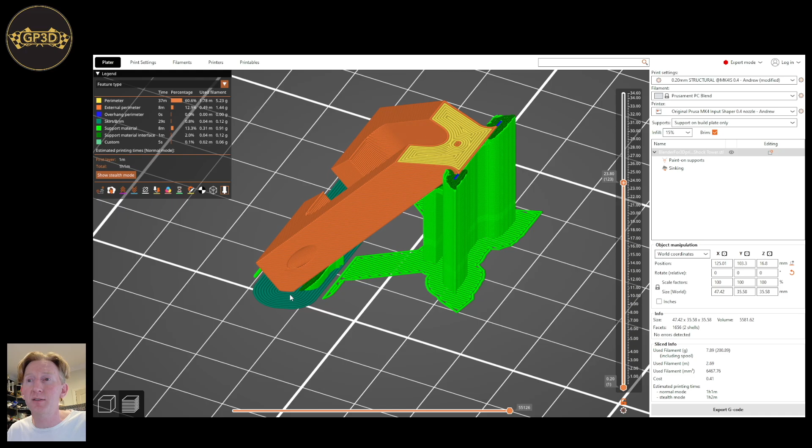You don't want it to get too heavy and fall over. Again, a small object like this would be fine, but a big object could actually physically get too heavy for its stiction at the base, and it could break off the bed just due to the weight and nothing else.

Another little setting that's pretty useful around the supports is the distance. So if I go to the print settings and support material, there's a style, and there's also this top contact Zed distance, or Zee distance if you're in the US. So you can change this to any number. The default's usually 0.2. So that's the gap between the support and the bottom of your actual component.

So that lets it detach when you finish, which is quite a big gap, and then you get a less quality underside. For this sort of thing, I'd probably go 0.1, 0.15. You can change this number to whatever you want, like 0.15, 0.17 I often use, is a good compromise of trying to get as close as possible.

Well, the idea is to get as close as possible to give it the best support, but without it sticking too hard, because the harder it sticks, the harder it is to break off and trim, post-processing to clean it up. So this is so tiny, I could probably get away with even less, like 0.12 or something.

I'll show you the 3 different support styles that this slicer has, which is grid, snug, and organic. Grid's kind of the old school one. Grid and snug are similar. The snug is a bit more compact, doesn't use as much material, doesn't use excess around the outside of the object. It's just a bit more refined, I guess. So snug's pretty common that I use, and organic's also pretty common that I use.

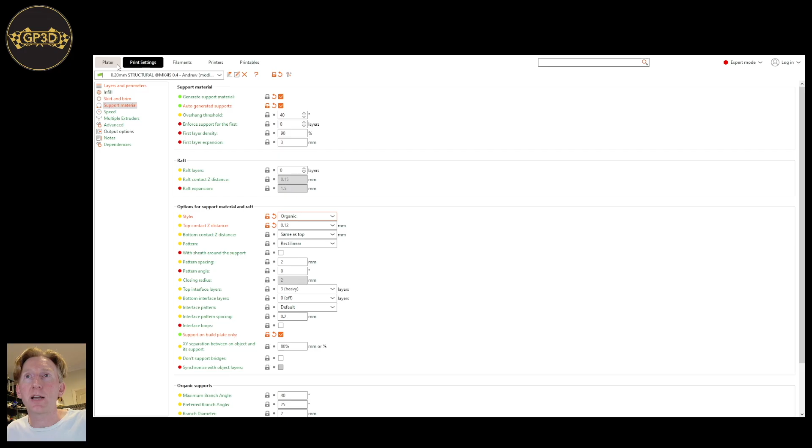So that was snug as the default for this profile. But I'll show you organic because that's really interesting. So switch over to organic and go back to the plater and reslice. So now you see we've got these organic tree looking type supports. So instead of it being a square box structure, it's more like an organic tree, literally as per the name, organic,

which often uses a lot less material, and it can also get to places by bending around the object, your actual component. It can get to places that the support from the build plate only can't get to. There is a support everywhere option which actually can build supports on top of your component, which then makes it a bit harder to take them off and may compromise the cosmetic look of the surface afterwards.

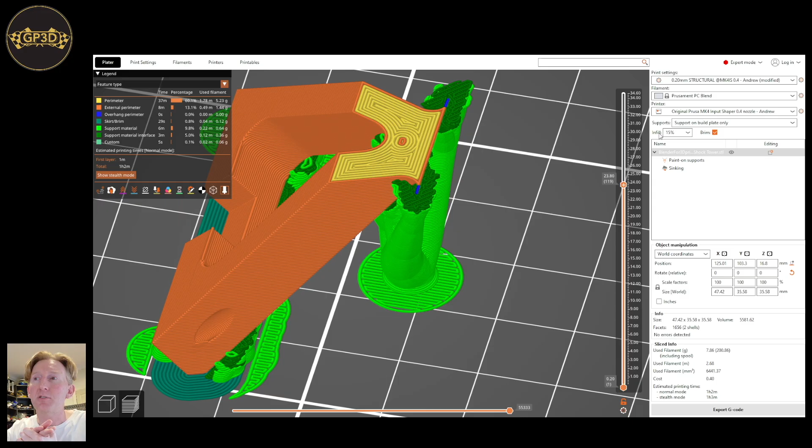But generally I'd try and use supports on the build plate only, and the tree supports can get to some areas. This one doesn't matter because it's simple to get to, but it can actually wind itself around the shape and back in a bit. It can go to a certain angle, and then support an otherwise not easily supportable area of your component.

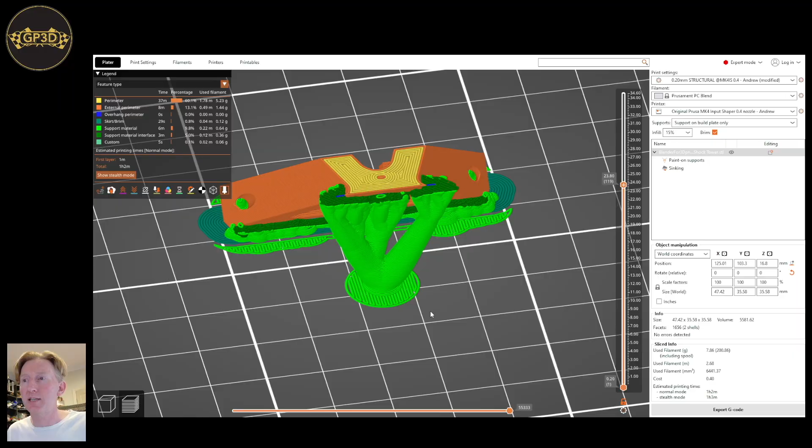And in a lot of cases, it seems to give a nicer finish, for whatever reason, I'm not sure, but it does support well. So that's a really good option to use, and it can often use a lot less material, because you can see here, it's just got one little base point, and it sort of branches out. So you've got like that amount of material rather than a full box structure. So that's pretty cool. Let's go with that.

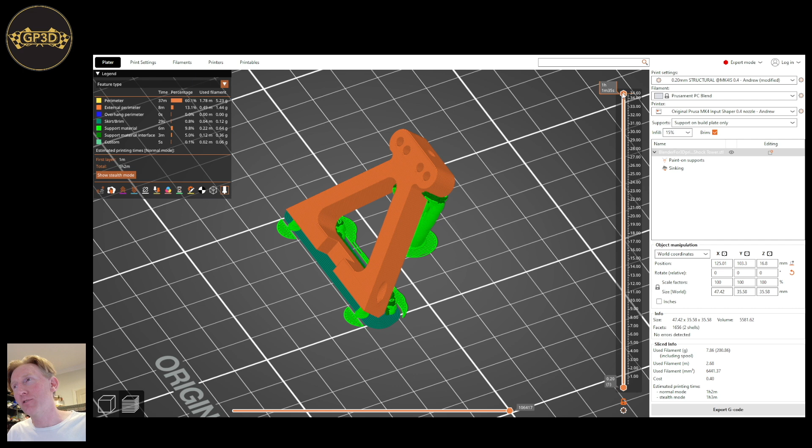So we've got it well foundation supported, got a brim, we've got our support structure, and we've got our overhang supported where needed. Well, maybe not, but good demonstration. We've got a good distribution of strength through the whole component, or as much as we can for this current design.

Cool. So at this point I go, right, I want to print. Let's do a first print. So I go export G-code, and then you just save your G-code file. So you won't be able to see this, but that folder structure I showed you before had the Blender, STL, slicer. Well, actually, let's save this first because I haven't saved this yet.

So 3mf is a reasonably open source standard for slicers. I found you can open the .3mf files in different slicers. So if I distribute a .3mf file to other people, they can open it in a different slicer. But I have found that it's not 100% one for one. So you might get some settings, but you might not get 100% of my settings. So it's a bit hit and miss. So it's not totally robust in that way.

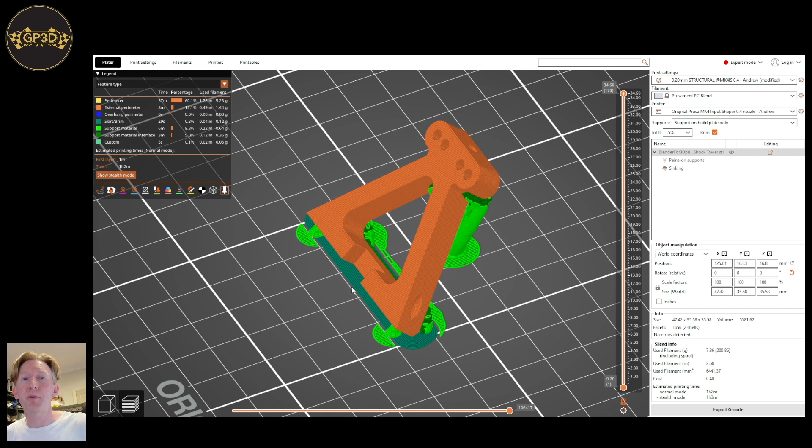If you opened it in Prusa Slicer, you would get it absolutely perfect as is, and every single setting I've done, you would get that shown in your slicer for this file. So yeah, the 3mf files are really cool because it gives you all of this slicing configuration, saves it all, and you can distribute that to customers or friends or whatever you need to do.

Yeah, so I've saved that now, and now I'll export. And then, so that was in my slicer folder. Now I'm going to save my G-code into my G-code folder. Cool. Yep. So that gives you your, in this case, .bgcode file, which is the binary version that Prusa uses currently. And then the next step is to print it.

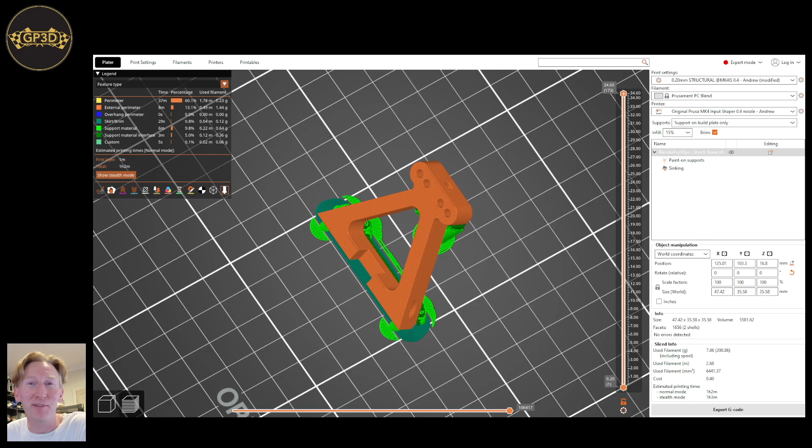So I'll go and do that. What'll I show? You can probably see the printer in the background. We'll see how I go with editing. Hopefully you'll be able to see bits and pieces. I'll go put it on this machine, and then we'll be back when it's printed.

I've now just put the print on, so that'll be buzzing away in the background. The print takes just over an hour for this printer, for this object. But I thought I'd just show you quickly the folder structure that I was saving the files to earlier. So here we've got my main folder, the Blender for 3D printing for beginners project, which is what we've been doing today. And then I've got those 5 folders, which is my default structure, the way I do it. So you can name them, number them, structure them whatever way you want. So here's my method as an example that you can use or otherwise.

So I'll just show you what we've now got as we've gone through the process. So you can see in Blender we've got the actual Blender CAD file, .blend, and its backup, .blend1, the original template that I just created as my starting point. And then when we exported the STL file from there, we get the Blender for 3D printing -shocktower.stl. So that's our STL file. And then we imported that into our slicer, and we saved our slicer as the same sort of name, .3mf. There's that one. And then from the slicer we exported our G-code.

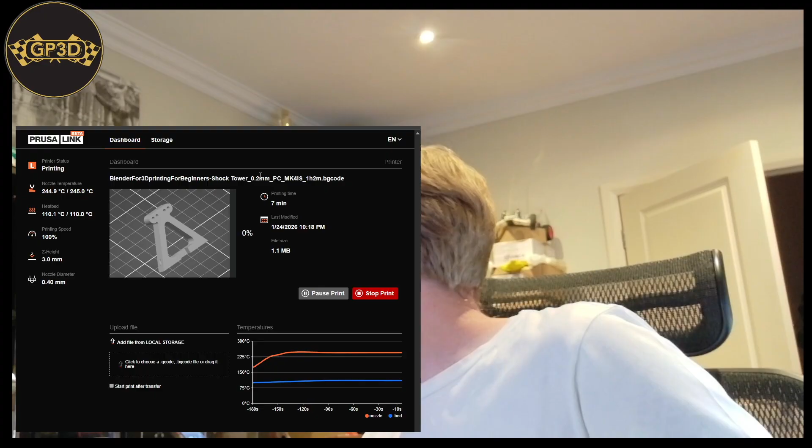So we can see here, this is the file that we just uploaded. And then back to the dashboard, and it's just started doing its warm-up routine. And off it goes. So we'll be back here in about an hour and 2 minutes. So there it is, all printed.

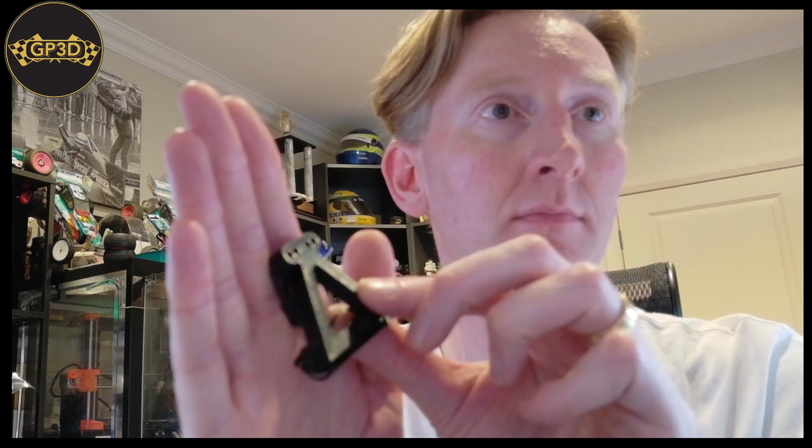So disconnect the supports, and the base bit, and the brim. So the rest of the edge of the brim there and the corners, I'll just trim off with a scalpel and give it a quick sand. So yeah, there you go. I'm pretty much going to wrap up this video with that. So that's the whole end-to-end process.

We've gone right from downloading and installing Blender, setting up the environment the way I set it up, the sort of mindset and a bit of the approach and concepts around structuring the design, and also the specific features that I use within Blender to do this. A tiny little micro portion in the edge of Blender to do something basic. And then we've sort of debugged a few mistakes and little issues and behaviors of it.

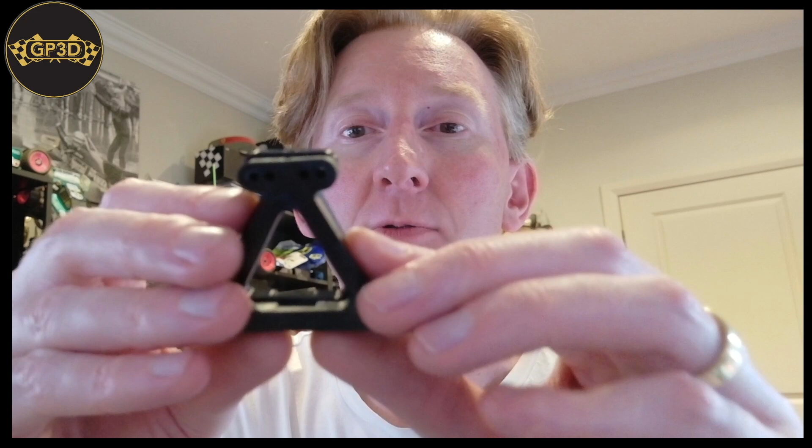And then we've got the print. So this is where I go and measure it all and double check and see how it compares. If there's errors or bits I want to change, then go through that process again, of course, until happy. Usually, especially for the first print, I'd print in a cheaper material like PLA or PETG. I did this one in PC Blend because it's small and shows you the sort of final product that I do. But yeah, neither here nor there.

So then I would clean up the part, measure it, check the holes, and then go and install it into the car to make sure it fits and integrates. And as I said, you just keep going through that iterative process of tweaking the design, improving it, fixing things, until you get to a point where you're happy with the result and it's fit for purpose. And off it goes down the track or wherever. So very cool.